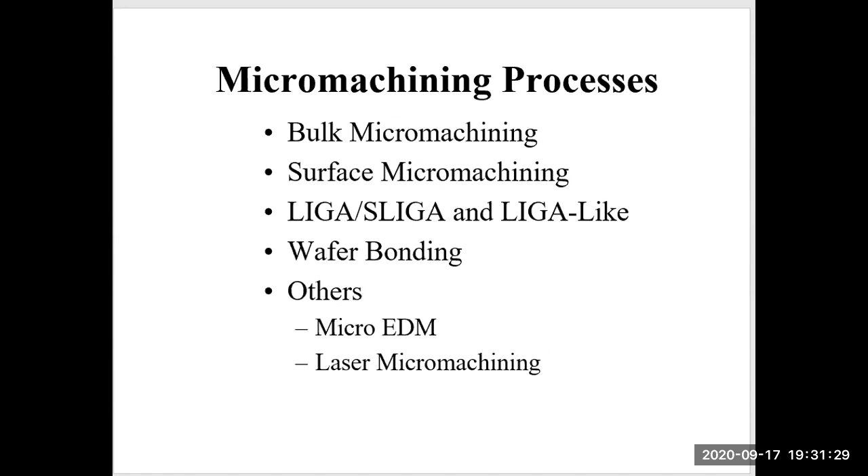Let's start from bulk micromachining. First, definitions.

Bulk micromachining employs orientation-dependent chemical etches such as EDP, KOH, and hydrazine in conjunction with several etch stop techniques to sculpt microstructures from the silicon substrate. That's the definition, actually from an NSF report in 1988 - pretty long time ago.

Another definition: in bulk micromachining, mechanical structures are created within the confines of a silicon wafer by selectively removing wafer material. A third definition: bulk micromachining uses chemical or plasma selective etching of silicon wafers with the help of masking films to form micromechanical structures.

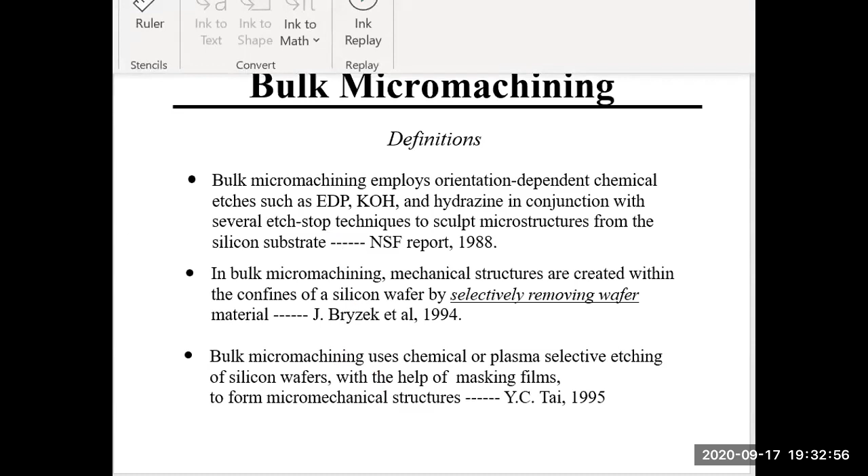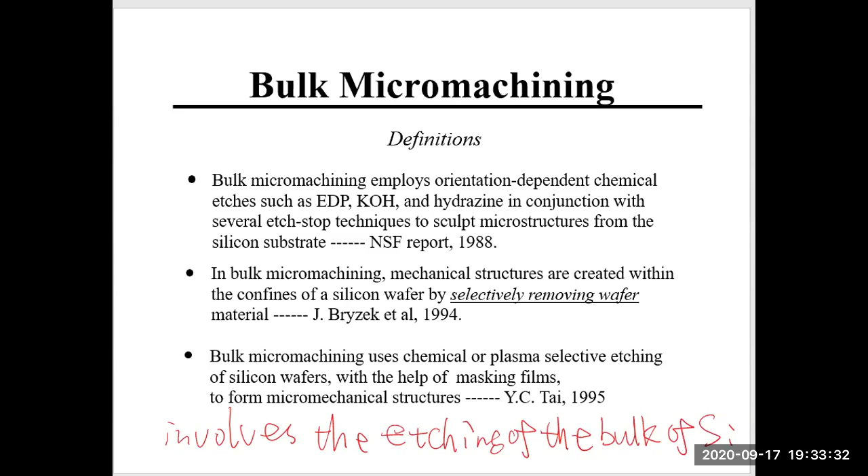Simply speaking, bulk micromachining involves the etching of the bulk of the silicon substrate. This etching can be done either with wet etching or dry etching, and it can be isotropic or anisotropic.

The bulk micromachining technologies include HNA, which stands for hydrofluoric acid, nitric acid, and acetic acid - the acronym HNA. Also KOH, which is potassium hydroxide; EDP, ethylene diamine and pyrocatechol; TMAH, tetramethyl ammonium hydroxide; xenon difluoride; and DRIE, deep reactive ion etching.

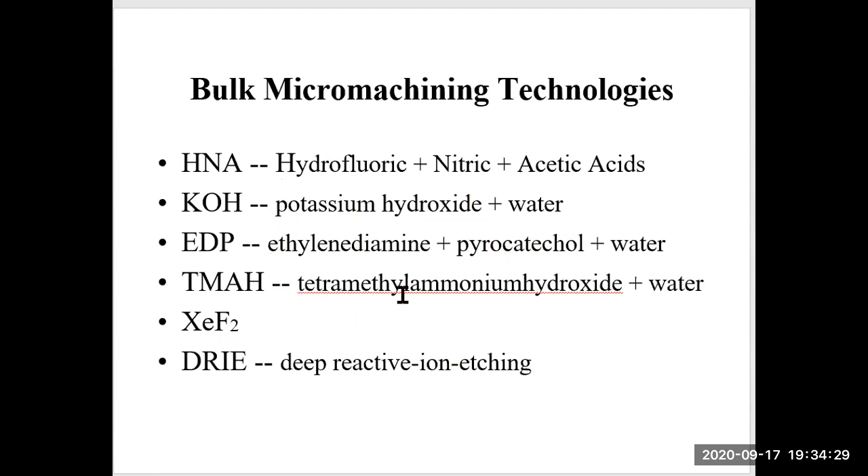So we have many bulk micromachining technologies. Let's first discuss HNA, isotropic etching.

These two figures compare the etch profiles of isotropic and anisotropic etching. The left side is isotropic etching - we know HNA is isotropic. For isotropic etching, the etching proceeds equally in all directions, both vertically and horizontally, so we observe lateral undercut underneath the masking layer, which is the top layer.

For anisotropic etching it's very different - the etching only proceeds, for example in this case, vertically, so there's no lateral undercut. And HNA is isotropic etching.

Ingredients of HNA, as mentioned briefly: it's a mixture of hydrofluoric acid (HF), nitric acid, and acetic acid or water - the acetic acid can be replaced by water. This is the overall reaction. We can observe that the acetic acid or water serve as a diluent; they do not participate in the chemical reaction. Only nitric acid and HF participate in the chemical reaction.

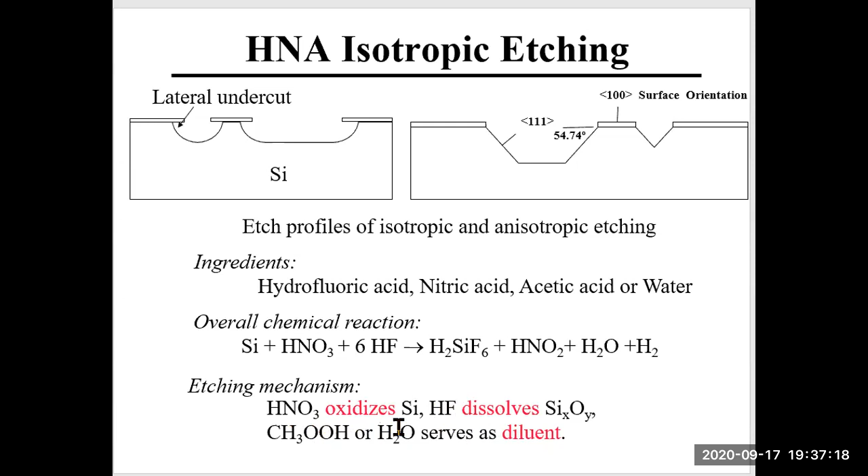HNA etching can be characterized by this triangular scale. I believe this is the first time for many of you to see this kind of triangular scale, so I will explain in detail how to read this triangular scale.

First, every corner or side represents one component. Totally we have 3 components, so there are 3 sides - that's the reason we use this triangular scale.

This side represents weight percentage of HF, from 0% to 100%, so this corner represents 100% HF. This corner represents nitric acid, from 0 to 100% - low concentration to high concentration of nitric acid. The bottom side represents the concentration of diluent, either acetic acid or water, from 0 to 100%.

Every point represents a recipe. To determine the recipe of one point, we simply draw 3 lines parallel to the 3 sides of the triangle. For example, to determine the recipe of this node, we draw 3 lines, this one and this one, which are parallel to the 3 sides of the triangle. Then we can determine the recipe of this node. For this specific node, we can say HF,

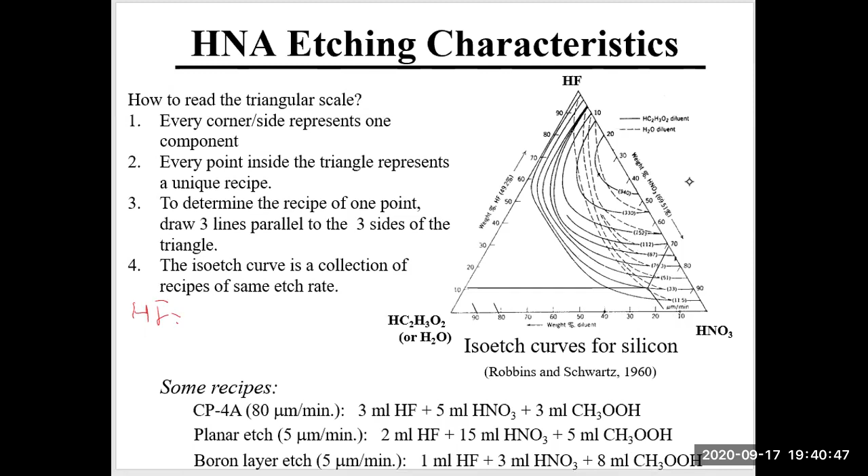the weight percentage of HF is approximately 12%. And the percentage of nitric acid is determined from this side, and by reading the scale, we can see nitric acid is about 71%, a little bit over 70%.

Finally, the concentration of the diluent, in this case acetic acid, is about 17%. We know that the sum of these three should be 100%. Total should be 100%. So this is how we determine the recipe of a specific point inside this triangular scale.

Then the isoetch curve is a collection of recipes of the same etch rate. Those curves inside this triangle are called isoetch curves. For example, this curve, labeled with 33 — all the recipes along this curve have the same etch rate, which is 33 micrometers per minute. So this is the isoetch curve for this specific etch rate. And then we can find many other isoetch curves.

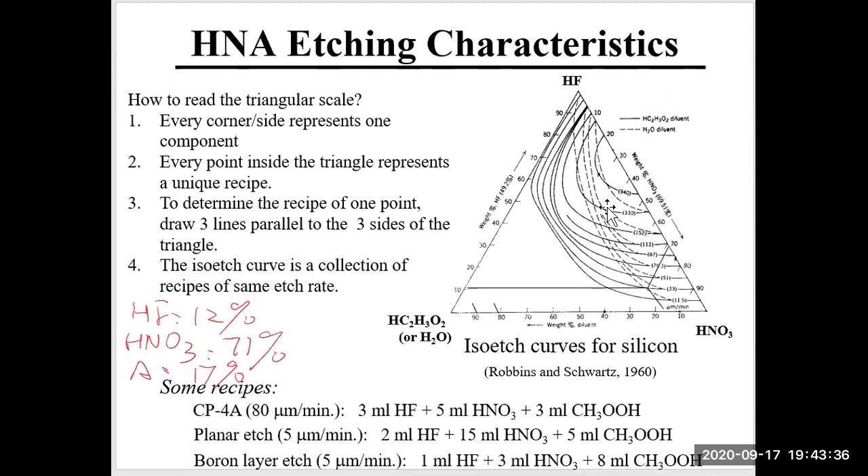Mask materials, namely materials which can be used as the masking layer for HNA etching. First is thermal oxide, actually silicon dioxide. Its etch rate in HNA is 300 to 800 angstroms per minute — actually pretty high etch rate. That's because HNA contains HF, and we know that HF etches silicon dioxide. So if we want to use thermal oxide as a masking layer, it has to be thick enough.

CVD silicon dioxide, chemical vapor deposited silicon dioxide — its etch rate in HNA is very high, 0.5 micron per minute. So typically we do not use CVD silicon dioxide as a masking layer for HNA, its etch rate is too large.

LPCVD silicon nitride, low pressure chemical vapor deposition — later we will discuss this technology. LPCVD silicon nitride has a very small etch rate in HNA, 10 to 100 angstroms per minute, so this is actually an excellent masking layer.

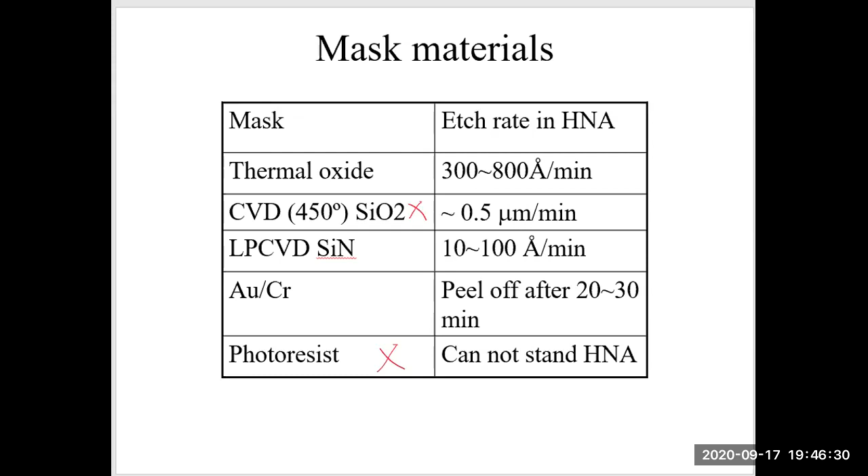Isotropic etching example. In this slide, I'm going to show you one example based on isotropic etching, specifically HNA isotropic etching. This example is a gas chromatograph on a 2-inch silicon wafer. Please know that a gas chromatograph is a method to separate gases by taking advantage of their different mobilities in a long capillary column.

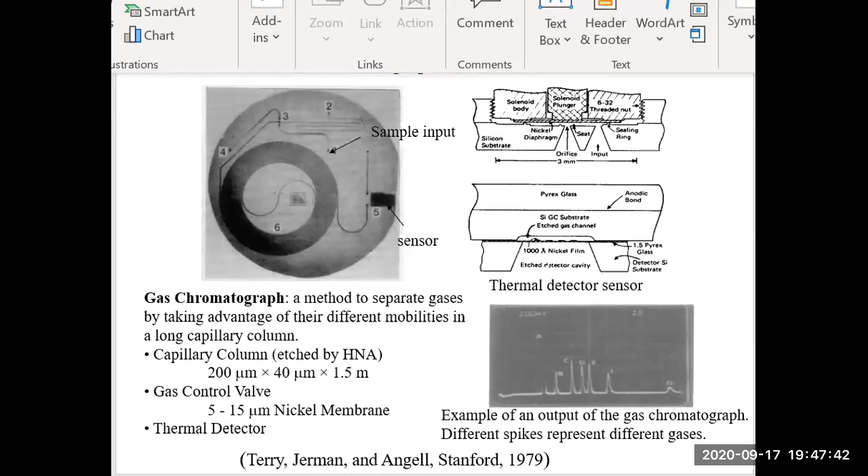Let me briefly explain the operating principle of a gas chromatograph.

First, we need a very long capillary column. Then we can inject gas mixtures, for example a mixture of gas A, B, C, and D.

They are injected into this long capillary column from the left side, then travel through the column to the right side. But they have different mobilities, or different travel speeds, so they arrive at the right side at different times. For example, B may arrive first, followed by D, A, and C.

So this mixture of gases can be separated by taking advantage of their different mobilities inside this long capillary column. That's the operating principle of a gas chromatograph.

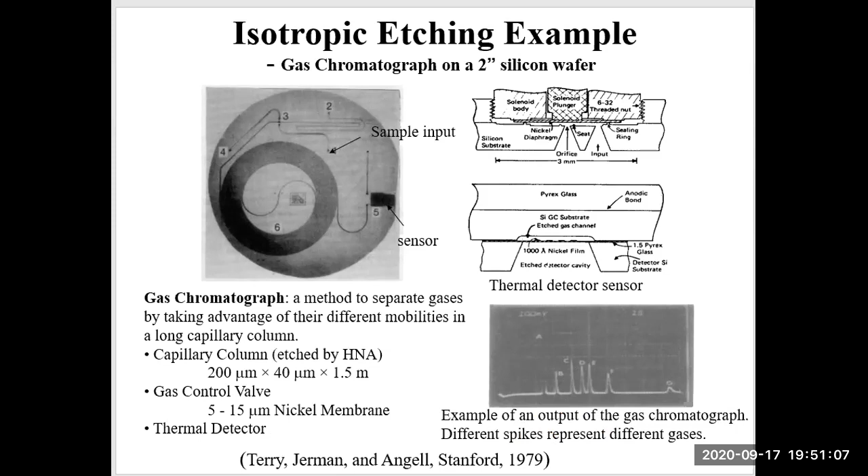Next let's discuss the anisotropic etching of silicon. This figure shows a cross-sectional view of cavities etched on a 100 silicon wafer by anisotropic etching. Please note that a 100 silicon wafer means that the top surface of the silicon wafer is a 100 plane.

We observe that anisotropic etching results in cavities with a slanted side wall. Actually this angle is 54.74 degrees, with very small or no lateral undercut. This is very different from isotropic etching. For this anisotropic etching, the etching only proceeds vertically, not laterally.

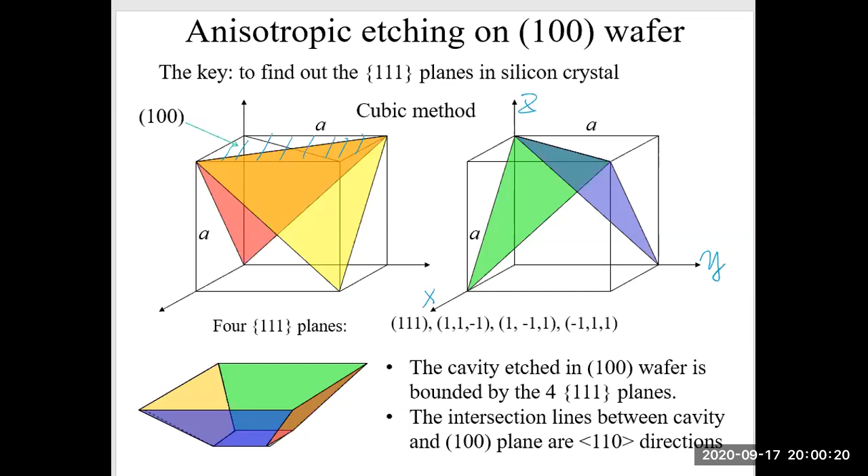But in addition... just a moment. Any questions?

Yes, Professor. So for this 4 111 planes that you had explained in the first cube, when we see the 1, 1, -1, so it is intersecting z at 0, is it? How is it intersecting? Very good question.

Yeah, I think I understand your question. Okay, just a moment, let me share the screen again. That's a very good question.

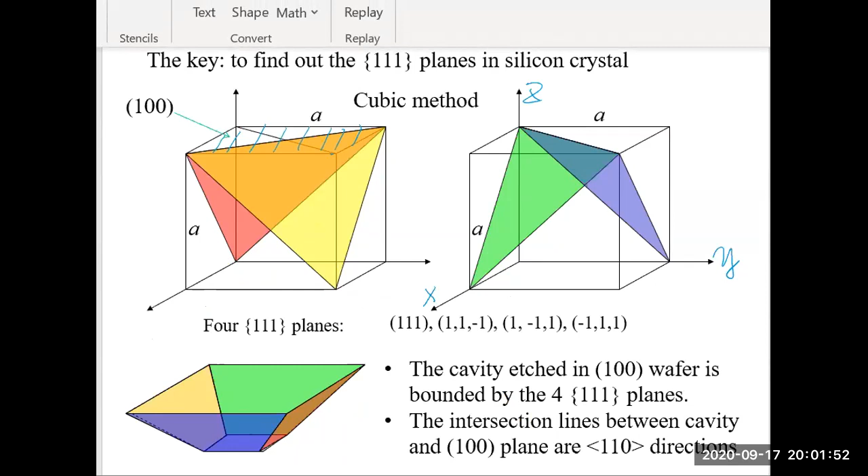So it looks like this red plane intersects the z-axis at 0, right? But actually, we can move it in a parallel way. You see, for example, this one - let me change the color, red one. You see, this plane is parallel to this red one. Then it intersects x and y with equal distance, but intersects the negative z-axis. Can you visualize that in your mind?

And the two parallel planes have the same Miller indices, so these two planes are the same plane. I wish that answered your question, right?

Because in order to get the Miller indices, we have to find the intercepts of the plane on the x, y, z axis. But for this red one, it actually cuts through the origin, right? So we are not able to find the Miller indices directly - we have to move it parallelly, and find the Miller indices of this one, and that will give us the 1, 1, -1. Okay, perfect, thank you. Very good.

The angle - next, the angle between the 1,1,1 plane and the 1,0,0 plane. In the slide, we mentioned that the slanted sidewall and the top surface had an angle of 54.74 degrees. Namely, this plane is a 1,1,1 plane, and the angle between the 1,1,1 plane and the top surface 1,0,0 plane is 54.74 degrees.

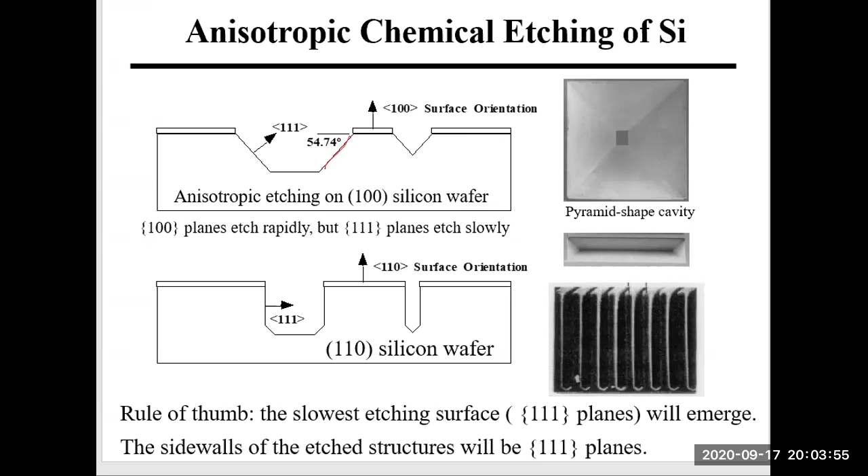How do we calculate this angle? Why is this angle 54.74 degrees? We can calculate this angle using two methods. The first one is called the cubic method, based on this cube.

This shaded plane is a 1,1,1 plane, and this top plane is a 1,0,0 plane. The angle between them can be calculated using this triangle, this green triangle. We can take out this triangle from this cube, and lay it out in a 2D plane.

This side is the edge of the cube, so its distance is a, and this side is half of the diagonal distance, so this distance is square root of 2 divided by 2, times a. Then, let's call this angle theta. Tangent theta will be equal to this distance divided by this distance - so a over square root of 2 over 2a.

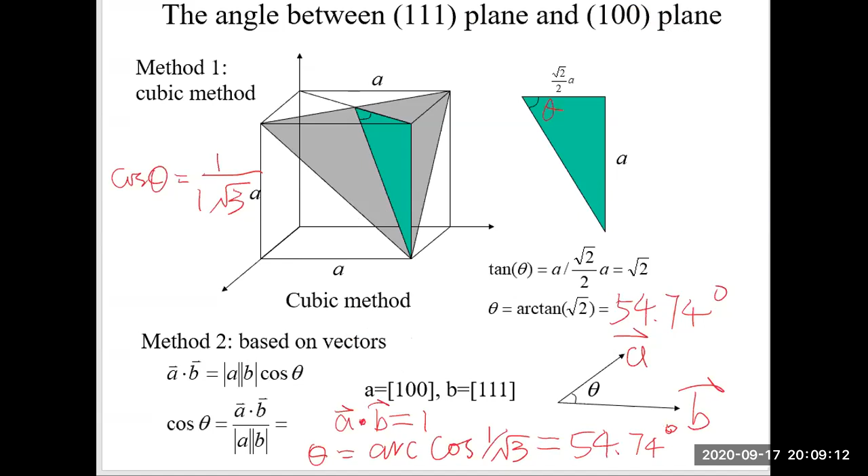Now let's summarize anisotropic etching on the 100 wafer. Let's first consider we have a rectangular mask or rectangular opening, with the edges perfectly aligned to 110 directions.

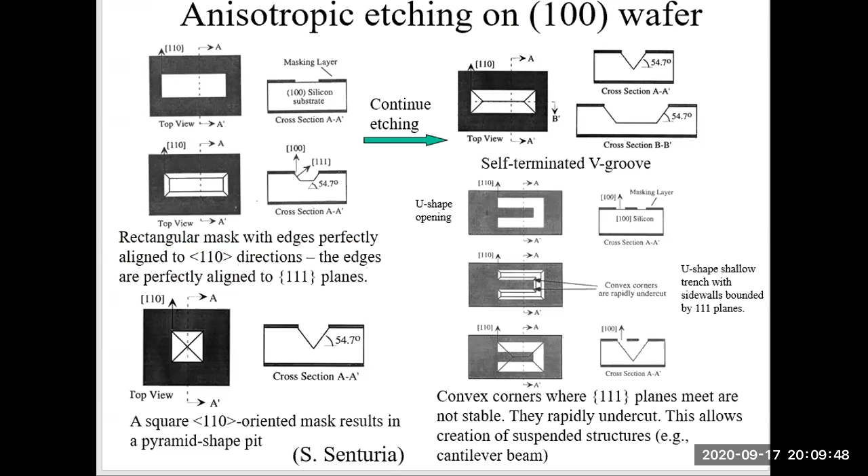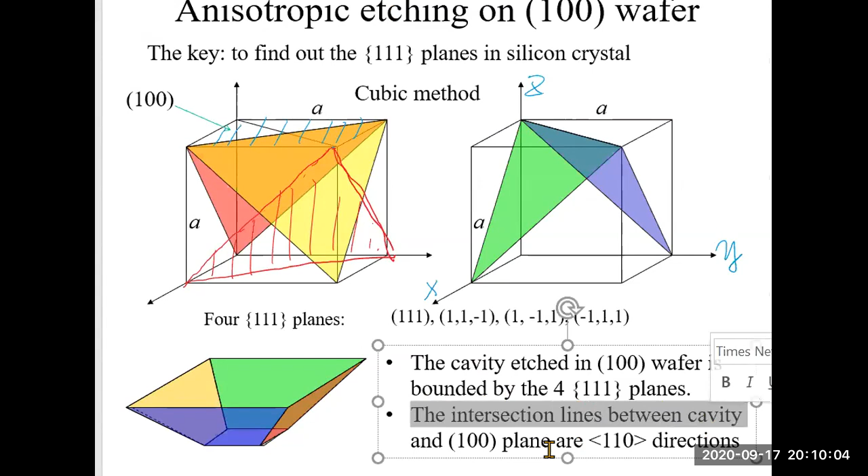Why do we have to have this requirement? In this slide, we learned that the intersection lines between the cavity and the 100 plane, this top plane, are 110 directions. Namely, the intersection line between the 111 plane and the 100 plane, the top surface, is the 110 direction. This diagonal direction is 110. This is also 110, right? So 110 directions are the intersection lines between the 111 plane and the 100 plane — those are 110 directions.

If this rectangular mask has all 4 edges perfectly aligned to the 110 direction, this means that the 4 edges are actually perfectly aligned to 111 planes. So after we start anisotropic etching, those 4 111 planes will emerge immediately. After etching for a while, a rectangular mask or rectangular opening results in a cavity with 4 slanted side walls formed by 111 planes. As I said, 111 planes are virtually stopped in anisotropic etching — they will stop the etching, so they will emerge. This is a cross-sectional view of this cavity. The slanted side walls are 111 planes, and the angle is 54.74 degrees.

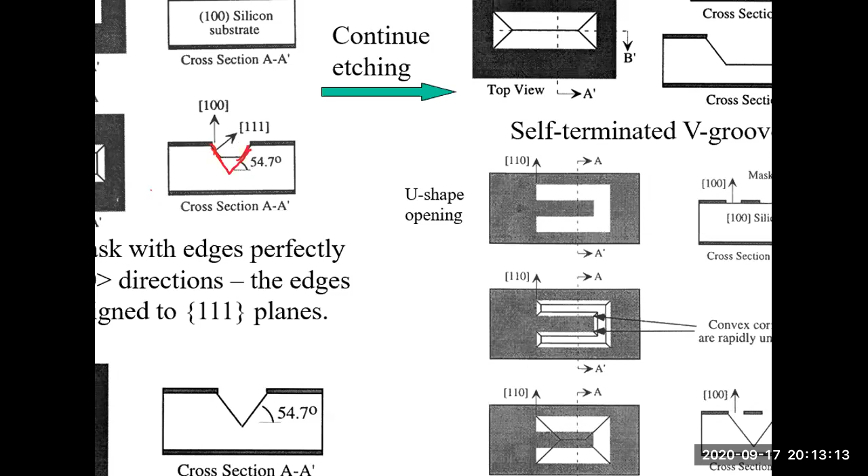We know that, let's focus on this cross-sectional view — these 2 planes are 111 planes, so they will not be etched. The etch will only proceed vertically. So eventually what will happen? Eventually these 2 111 planes will meet with each other. Or we can see that the 2 111 planes on the long sides meet with each other, and then eventually we obtain a V groove. This is a cross-sectional view along AA, along this line, and the bottom is a cross-sectional view along BB, along this line. So this cross-sectional view is a V shape. We call this a V groove.

And it's also called a self-terminated V groove. Why do we call it self-terminated? If we still continue the etching, what will happen to this V-shaped cavity or V-shaped channel?

Nothing will happen, right? Because now this structure is completely bounded by four 111 planes, and the 111 planes serve as an etch stop. So the etch will be stopped. Even if you continue etching, this V shape will not change. We call this self-terminated. The etch will be terminated, it will be self-terminated.

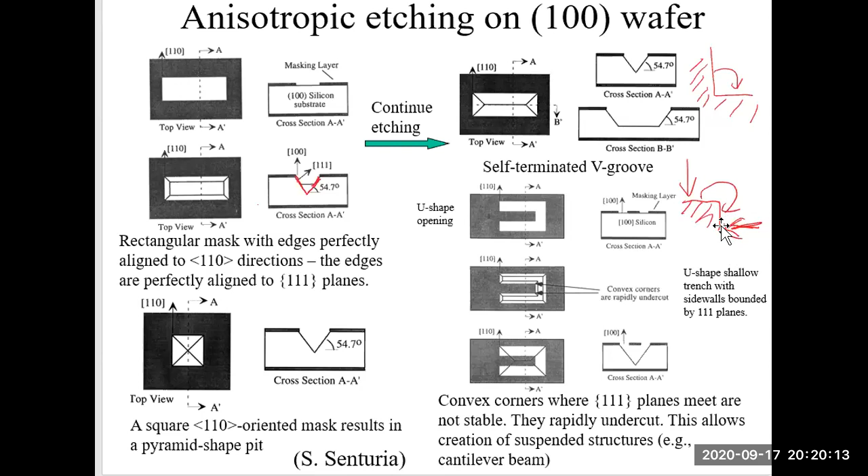This slide shows a 3D illustration of the convex corner undercut. So we still have a kind of U-shaped opening. Initially we observe this U-shaped shallow trench, and all the side walls are 111 planes, and these two convex corners are not stable, so they can be undercut. After the undercut starts, the exposed planes are not 111 planes anymore, and will be quickly etched. For example, in this case, actually a 411 plane is exposed, which will be etched quickly.

When will the undercut stop? It will stop when this 111 plane on the back is reached. Then the convex corner disappears, and the undercut will be stopped. So this is the final structure. The final structure will be bounded by 111 planes with concave corners, no convex corner, and this gives us a suspended beam, or freestanding cantilever beam.

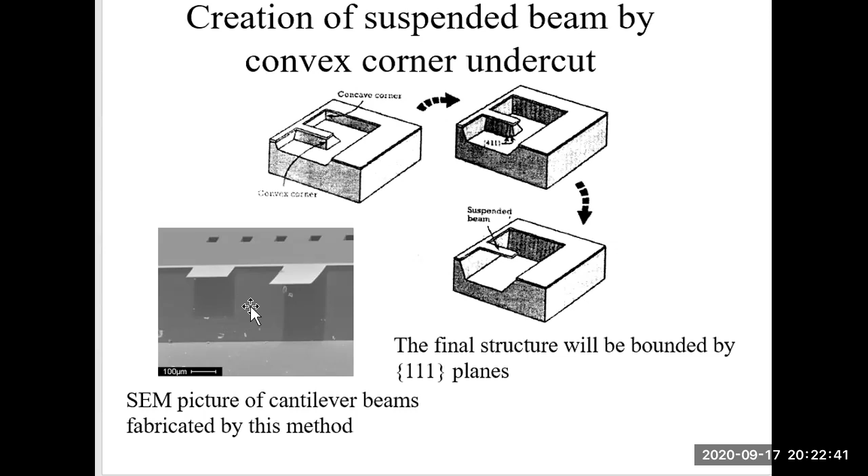Now let's consider this question: what will happen if the edges of the rectangular mask are not perfectly aligned to the 110 direction? I know that 110 direction is an intersection of 111 plane and 100 plane, by this direction. This is a 111 plane, so it intersects the top 100 plane along this 110 direction. And in the silicon wafer, there is a major flat, and the major flat is the 110 direction. So what if this rectangular opening is not perfectly aligned to this major flat, namely the 110 direction? What will happen?

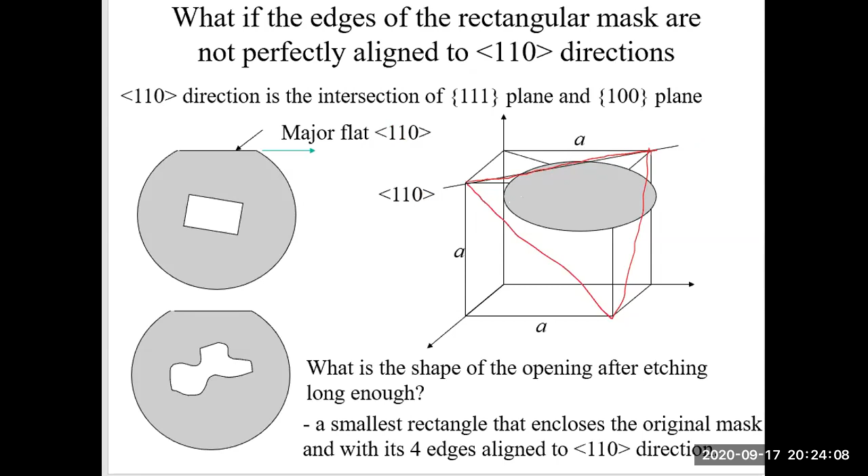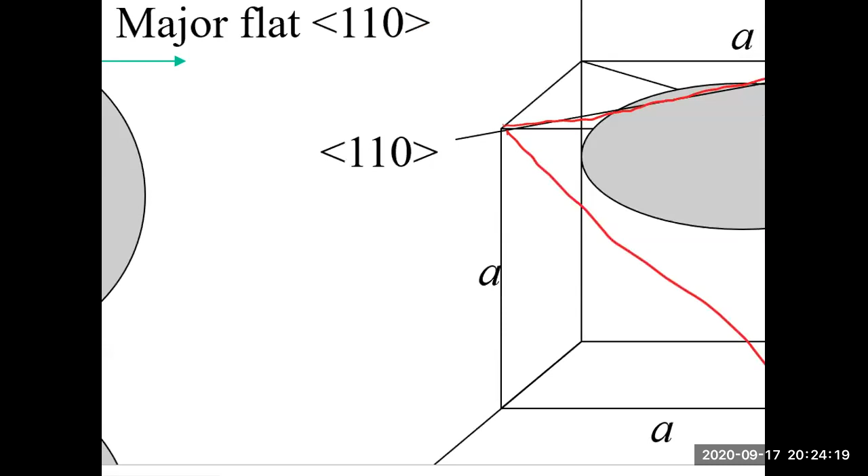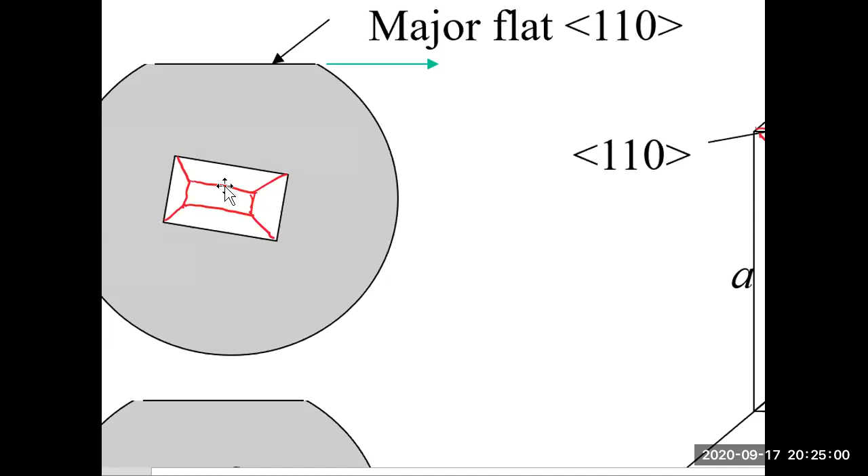Okay, let me enlarge it. Will we get a cavity with four slanted side walls like this one? Or the question is, are these four side walls 111 planes? They are not, right? Because the edges are not perfectly aligned to the 110 direction. So where are the 111 planes? Or where are the nearest 111 planes?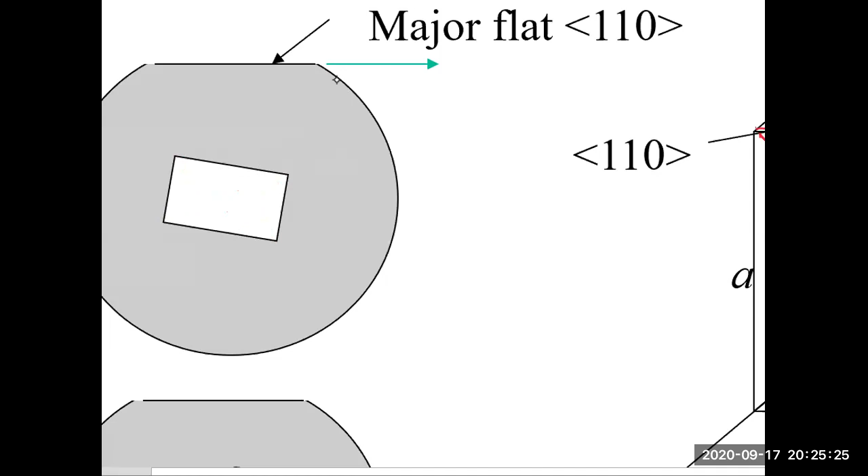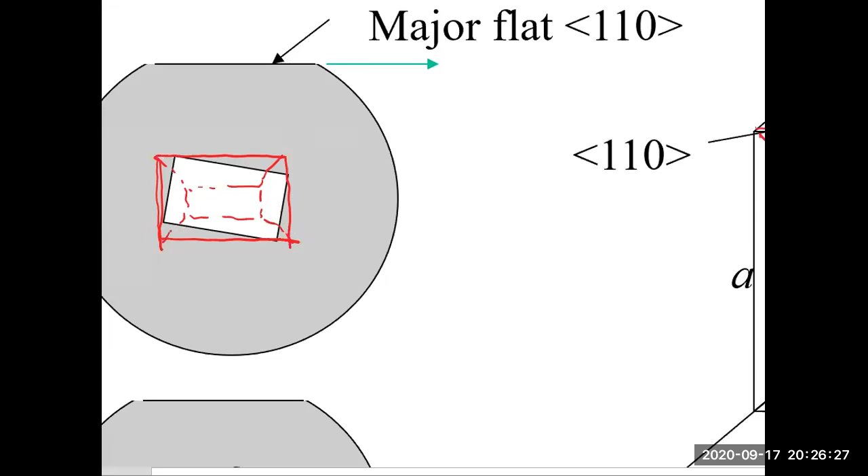So right here, this line is parallel to the major flat. Okay, so actually the opening, the final opening will be the smallest rectangle that encloses this original mask, and its four edges are aligned to the 110 direction, because those are the nearest 111 planes. Make sense?

Now, what if we have an opening with an arbitrary shape, like this one? What is the shape of the opening after etching long enough? Again, please note that the cavity will be bounded by the four nearest 111 planes. So the opening will still be the smallest rectangle that encloses this opening - a smallest rectangle that encloses the original mask with its four edges aligned to the 110 direction. That's what we end up with eventually, for an arbitrary opening.

Any question? Okay, so that's anisotropic etching on 100 wafer. Okay, next let's briefly discuss anisotropic etching on 110 wafer.

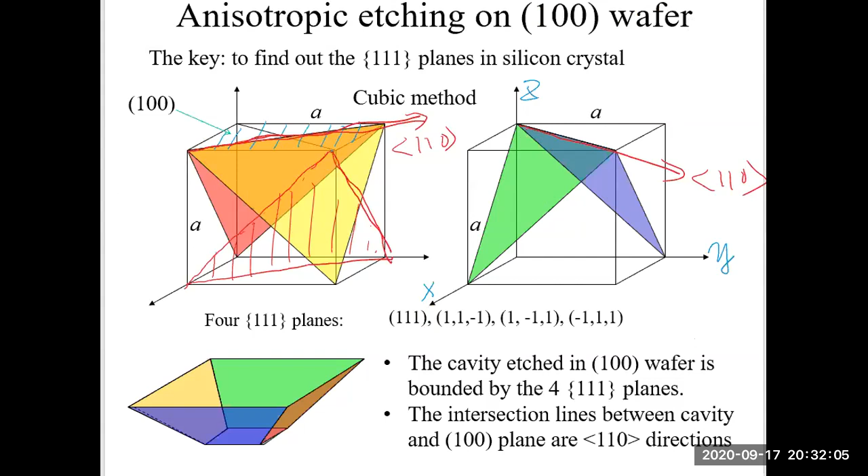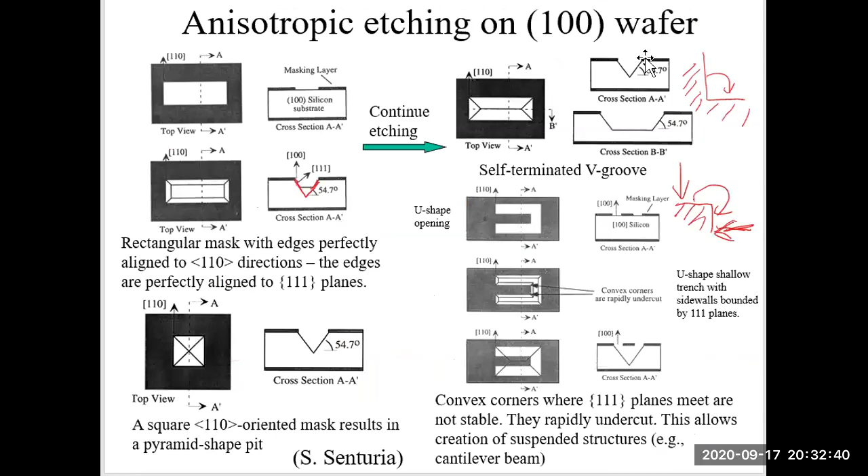In addition, we can also fabricate trenches with vertical side walls, or V-shaped trenches with slanted side walls, on 110 wafer. But please know that we are able to fabricate V grooves on 100 wafer as well. And we can calculate this angle - this angle will be equal to what? 180 degrees minus 2 times 54.7, right? That's the theta of this angle of the V groove fabricated on 100 wafer.

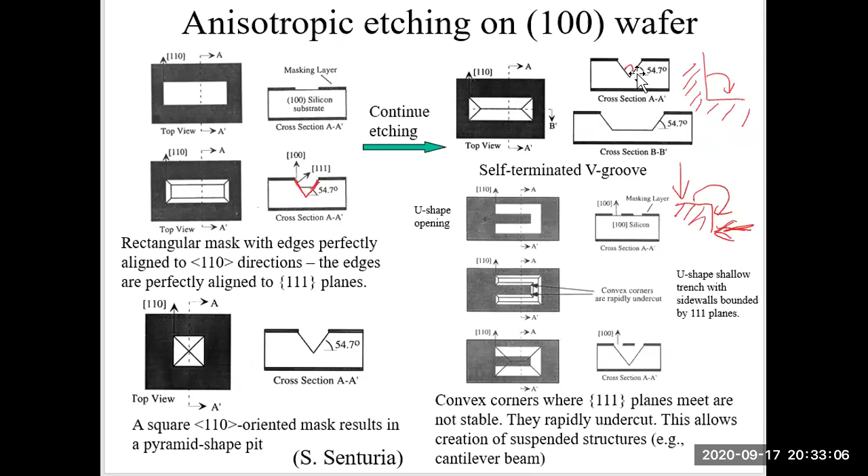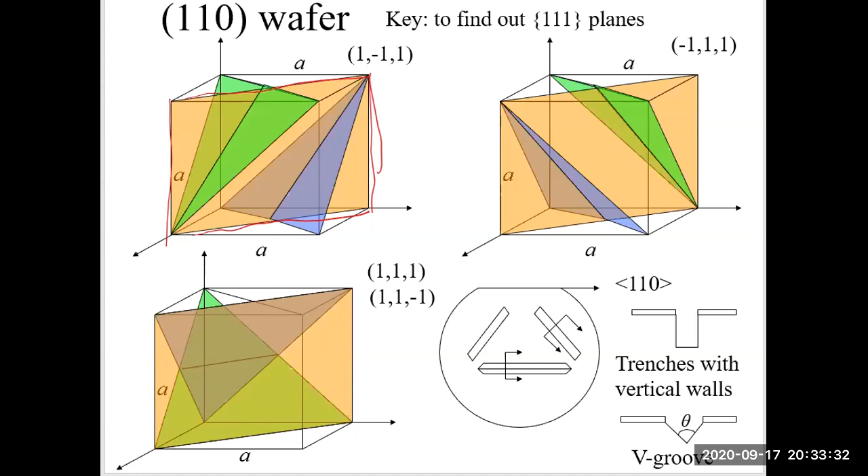We can also fabricate V grooves on 110 wafer. However, the angle will be different. The calculation of this angle is shown in this slide, but please note we skip this one - don't worry about this slide, let's go to the next one. The calculation of this angle theta, the angle of the V groove on 110 wafer - this angle is simply the angle between these two 111 planes, and we can use this rectangle to calculate theta.

This vertical distance is A, the length of the cubic edge. This distance is half of the diagonal distance, so square root of 2 over 2 times A. These two lines represent the two 111 planes.

This angle is equal to theta over 2. Tangent of theta over 2 is equal to this distance A divided by square root of 2 over 2 times A. So tangent theta over 2 is equal to square root of 2.

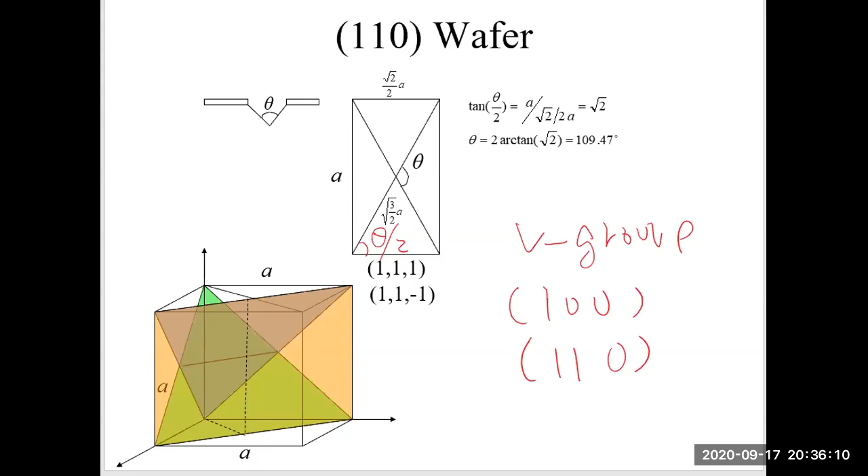You will observe bubbles on the silicon surface. Advantages of EDP: excellent boron etch stop performance. Later we will explain what is a boron etch stop. But EDP has excellent boron etch stop performance.

Wide range of etching rate, from 10 to 100 micron per hour. Low silicon dioxide etch rate, so silicon dioxide can be used as an etching mask. Chrome gold can also be used as a masking material.

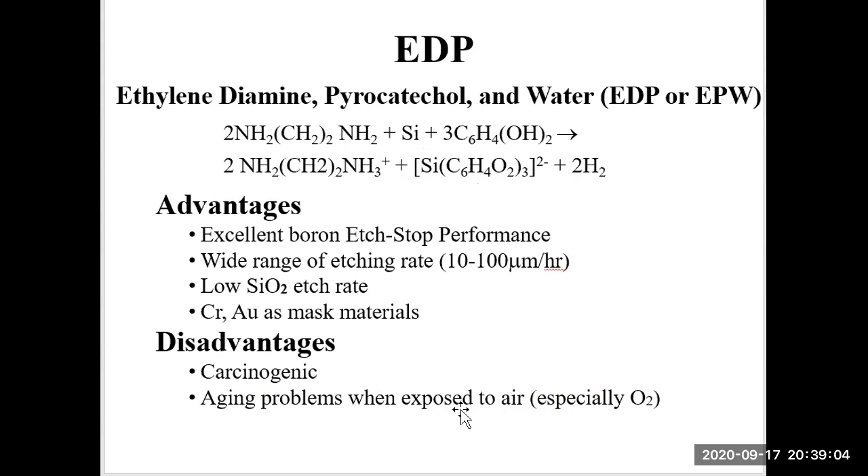Another disadvantage is its aging problem when it's exposed to air, especially oxygen. So it is associated with some aging issue, namely the etching rate may vary, may change or decrease, in air.

This table summarizes some EDP recipes: B etch, F etch, S etch. B is the basic recipe. F basically means a fast etch, so it has a higher etch rate compared to B etch. SH is a slow etch, so its etch rate is very small.

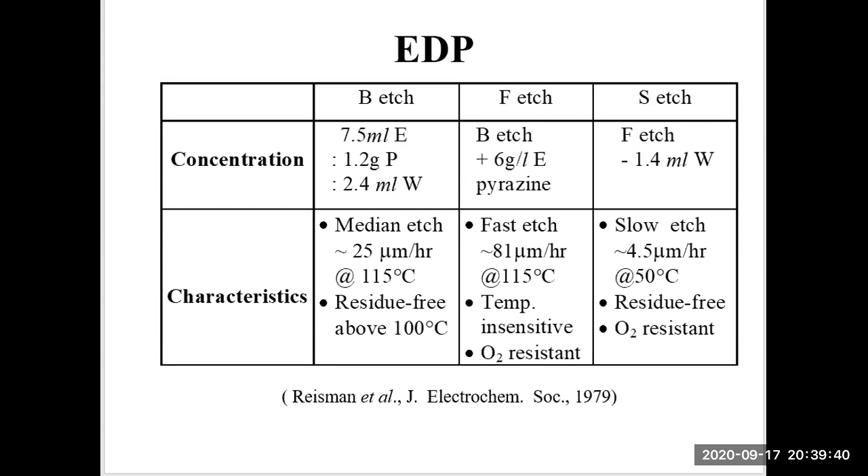The second anisotropic etchant is KOH, potassium hydroxide, 20 to 50%. Advantages of KOH: very high 100 to 111 etch ratio, as high as 400.

This means if the 100 plane is etched by a certain amount...

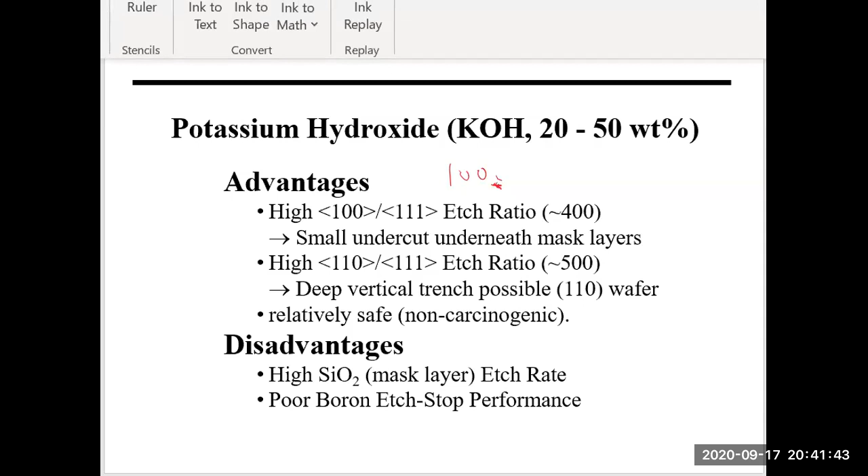So this etch ratio, 400, basically means if the 100 plane is etched by 400 micron, the 111 plane is only etched by 1 micron. So KOH is very anisotropic, the ratio is 400 to 1.

This leads to small undercut underneath the mask layer, very small undercut. And the 110 over 111 etch ratio is even higher, 500 or even higher. This leads to deep vertical trenches on the 110 wafer. And KOH is relatively safe, it's non-carcinogenic, so it's much more widely used than EDP.

Disadvantage: high silicon dioxide etch rate, so if you use silicon dioxide as a mask layer for KOH, this layer needs to be thick enough. Another disadvantage is poor boron etch stop performance, not as good as EDP, which has excellent boron etch stop performance.